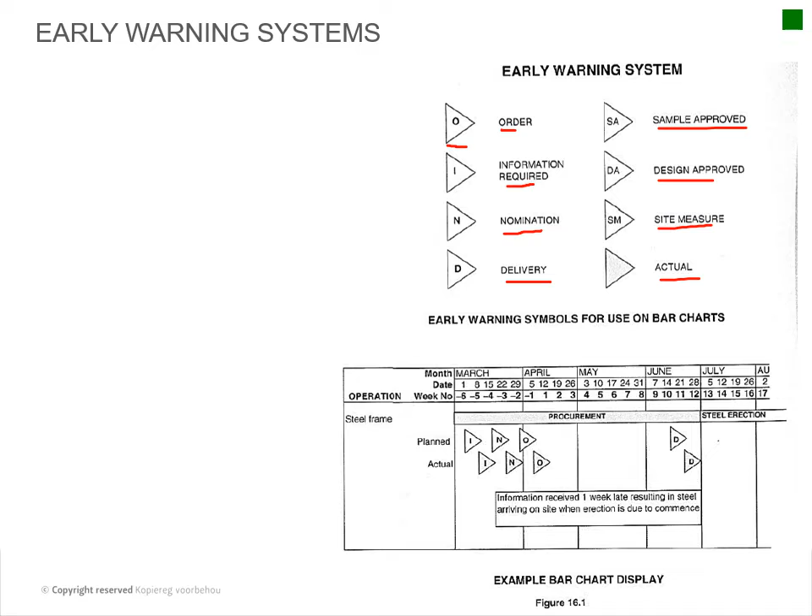This is more practical, I'm not going to test you guys on this. So okay, then your progress and delays, progress reporting. Example of events: the contract is frequently delayed. So you can go read through 16.6 for me, which is all about progress and delays, and it's very important that you guys do read through this. And I'll probably in the near future have a bit of an informal assessment on this.

So please make sure that you guys know what a contractor risk event is. For instance, delay by the subcontractor, weather delays, labor, and employer risk events such as variations in designs, changes, late possession, and other reasons. So you guys must be able to discuss

16.6 for me. Okay, then progress reporting. The purpose of progress recording is to provide a record of weekly progress in order to assist the construction director, contracts manager, and the site agent, and to inform the monthly site progress meeting with the architect and his administrator, basically to keep track of what's going on.

Then you have many procedures to assist you in this. In this chapter you can easily see they've got this little diagram that's included here.

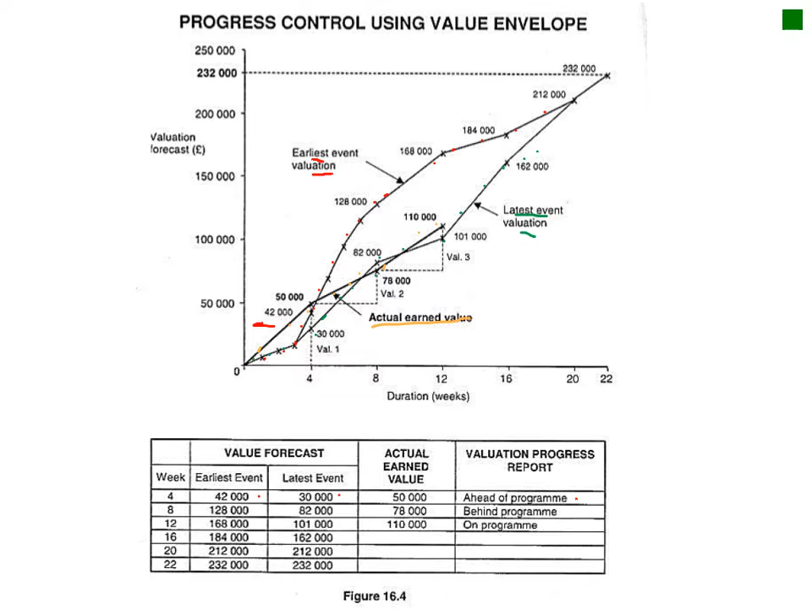Behind on schedule - here's your behind, your 78, there's your behind. Anything in between this area is on program. So there's basically a bit of a float that you've got here.

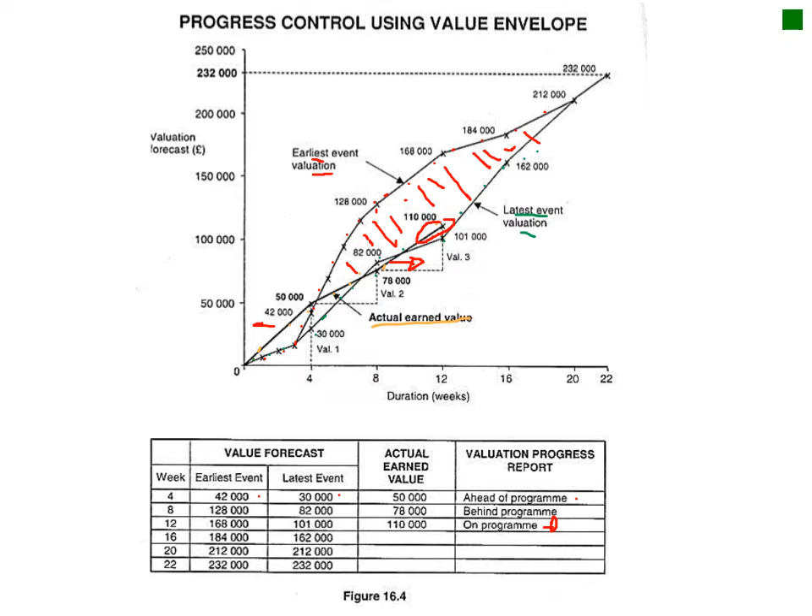So you will see here is 110, meaning you're on program. This is a bit of a theory question that I might ask, so please go through this section. It's very straightforward, just remember that.

Then you need to go through delays. This is theory we've dealt with before - where the employer is at fault, where the contractor is at fault, where no one is at fault, force majeure as usual. You've done this in CCM, so I won't repeat it, but you'll have to draw from this when you do your discussions. Please don't neglect this.

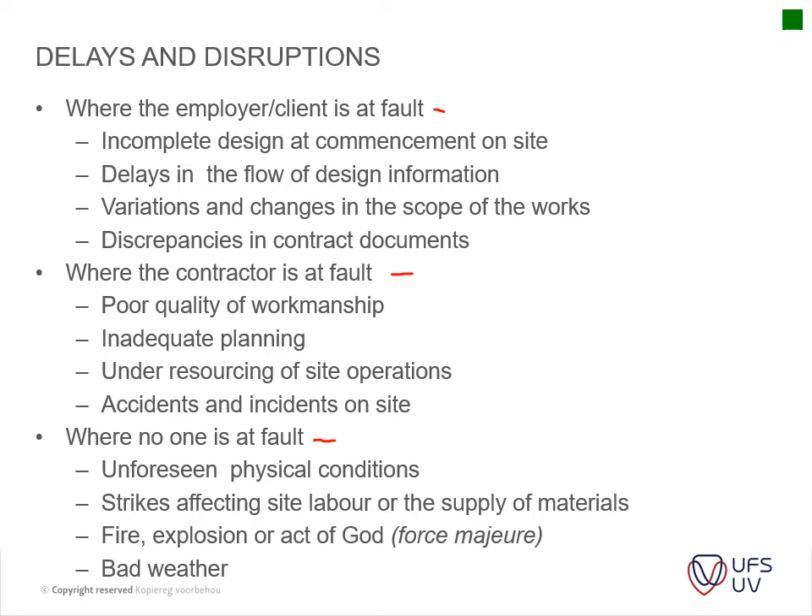Then we focus on your types of delays. You've got your delay event - if you go to page 360, you'll see it. It refers to something that happens or a set of circumstances that arise leading to a delay. The delay event may be the responsibility of the employer or the contractor, or may be beyond the power of either party. So that's a delayed event - it's an event that causes the delay.

Then you've got culpable delay, where the delay is the fault of the contractor. This is also referred to as a non-excusable delay or contractor delay, but we'll have a look at culpable later on - it just means someone is to blame for the delay.

Then you've got a non-culpable delay, where the contractor is late through no fault of his own, which includes items like late issuing of information.

And then you've got your neutral delays, divided into different sections. This is where the delay is caused by factors beyond the control of either contracting party, but doesn't mean neither party bears a risk.

Neutral delays at the contractor's risk include bad weather, late delivery, delay by subcontractors. Neutral delays for the employer's risk include exceptional bad weather, discovery of ancient artifacts, strikes affecting site work, off-site manufacturing or transport. Then you've got your concurrent delays, where two or more delays happen simultaneously.

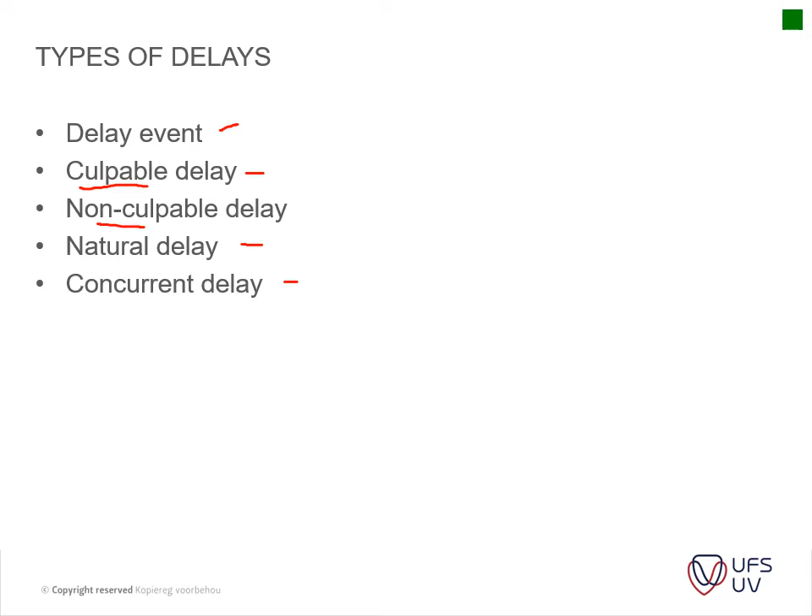All of these things lead to extension of time, which is very important for me - you must learn this. It comprises the following: through specific clauses in the contract, extension of time is usually for specific events beyond the contractor's control.

Procedures for the contractor to follow when making an application - he has to give notice at least. Then the procedure for the contract administration to follow when considering the contractor's application. There's procedures for how to claim it, and procedures for how to accept or reject it. Please don't just learn these three bullets, read through the sections.

I want you guys to read through 16.9 to get background, so you can extensively discuss the items listed there.

Then we get to the principal agent - either he grants the contractor the extension of time, or he should state the reason, review the situation later, give relevant notice, and then calculate the time and cost implications of that. That's more or less the procedures, a shortened version.

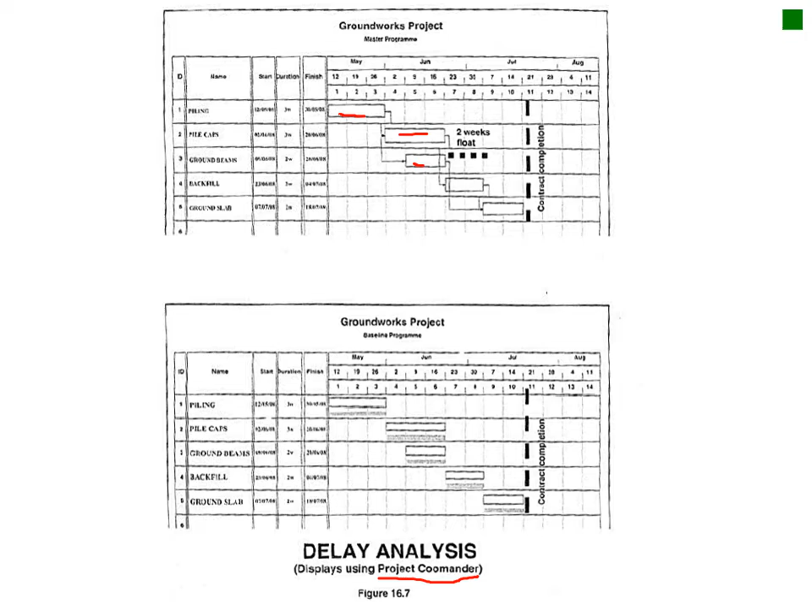With all the linkages in, and then it's the same program given underneath with your baseline underneath. In Project Commander, that little line is the same. Project Commander just gives you the opportunity to keep the links in and show all the information like this. Okay, so this was before the project started.

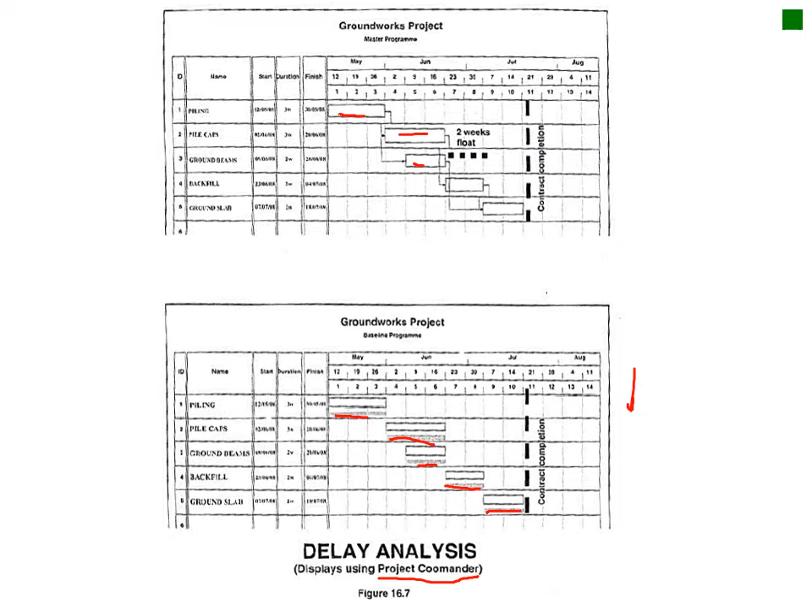Now during the project there was the delay that we spoke of earlier. So you can see this is where the actual progress is, and this is where it was supposed to be at week 4.

So now what the program does is move the entire program out, and so that item is still not complete - it still has quite a bit of work to do. This one had the 2 weeks float that they spoke of, so that can start on that delay, and then you can see that this item's moved out.

Okay, so this is still on the baseline. This one moved out because it's linked to that one, and that moves out, and that one is linked to that one. But you can see your baseline stays intact, and it shows this was your planned program which has been extended. Okay, fairly straightforward.

So you must be able to indicate to me what a baseline program is. It's basically a baseline, a snapshot of what your original design was.

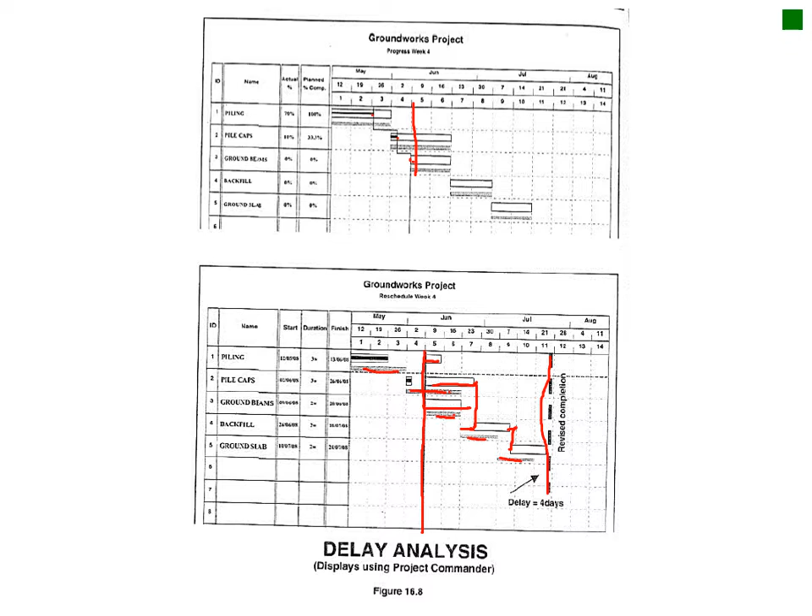They continue with the discussions, and then the revised program at week 4 update - your logical links are unhidden to show dependencies, including 2 employer risk events impacting after week 4. The update includes a 10 days delay for the redesign of the rebar to the ground beams, and a further 8 days delay for off-site fabrication of the new rebar.

Then your progress at week 8 - so now we take a snapshot at week 8. The update for the progress is as follows, showing your revised completion date to be 12 plus 3 days. So your overall delay is now 8 days, which was added, and we're going to show it to you now.

So the delays in 16.9 are partly contractor risks and partly employer risk events.

The employer risk events are where the cause of the delay is the employer's responsibility under the contract, including instructions, exceptional weather, unforeseen ground conditions, and in this case design variations to the ground beams. So basically, there's 10 days delay for redesign of the rebar to the ground beams, and a further 8 days delay for off-site fabrication of the new rebar. So 8 days was for the contractor, the rest was for the employer.

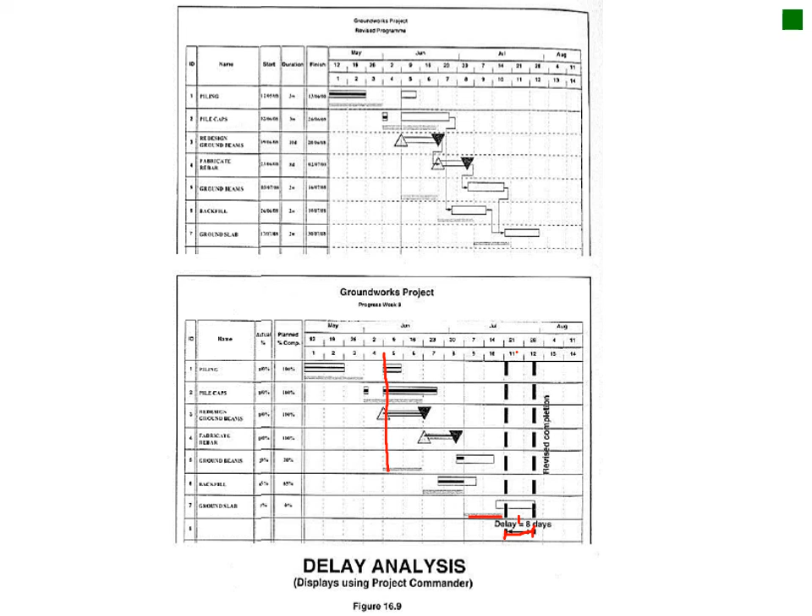Okay thanks guys, and then just on page 375, there's a few last items I want to highlight for you. Please read through 16.16. Here they talk about the project being delayed for one reason or another - the contractor may wish to bring forward the completion date, or may be asked to do so by the client. If the contractor is not at fault in these circumstances, he should be paid for this trouble and effort through a separate agreement with the client. Some standard conditions of contract, such as the ICE conditions, provide for this.

There are several types of accelerations which have different legal meanings. Guys, these items - pure acceleration, constructive acceleration, and expedite accelerations - are not too important for me. It's legal terms, but for our purposes we're not going to focus on that too much, because it is quite technical, and we don't usually work on ICE contracts. It basically just means what we discussed: there are 3 delays - either it is for the contractor's cost, no one's cost, or the employer's cost. So those are the main 3 focus areas you need to know about your delays.